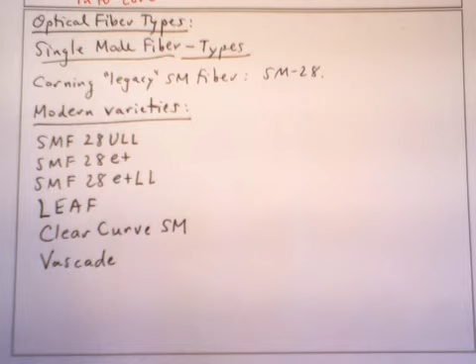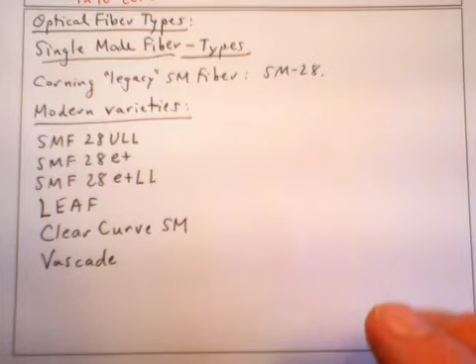Okay, I'm here continuing the discussion of optical fiber types. We just finished talking about multimode fibers, and in this video I'll talk about single mode fibers, and I'll talk about 3 different SMF28 varieties, and I'll also talk about clear curve SM. Leaf and Vascade fibers will probably come in the next video.

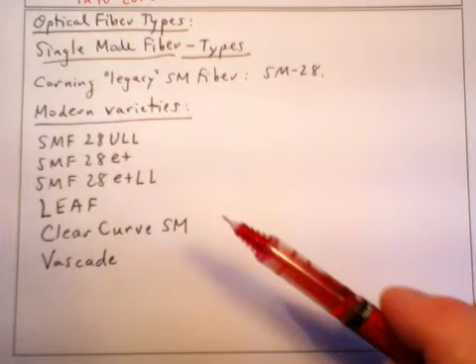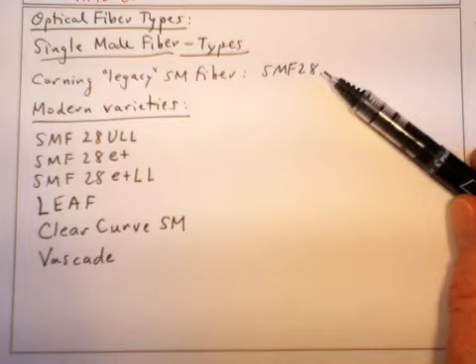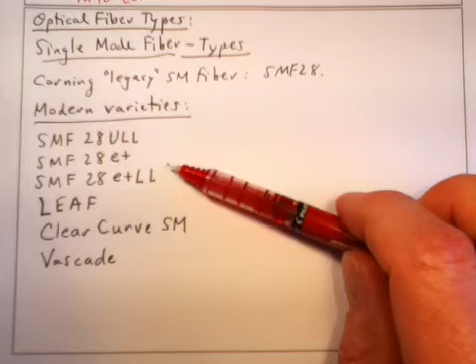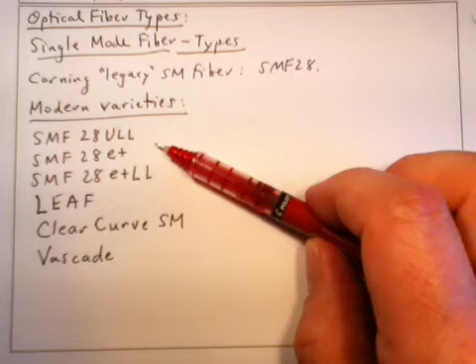If we're talking single mode fibers, the most famous single mode fiber out there is Corning's SMF28. It's been around for many years, and it's gotten better and better over time, and there are 3 different varieties currently available as of summer 2012 on their website. These 3 varieties are the SMF28 Ultra Low Loss (ULL), and then there are 2 varieties labeled with E+, meaning the water peak has been effectively removed, with a specification for the maximum loss at the water peak wavelength. These fibers are built for coarse WDM systems, which use wavelengths throughout the whole 1310 to 1550 range. I'll show you these specs.

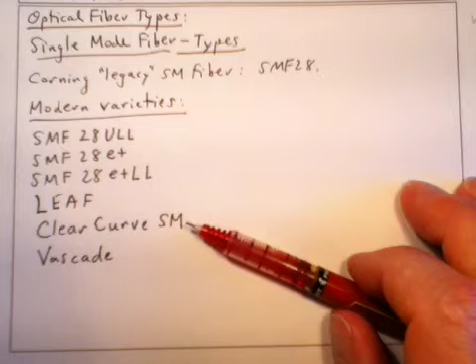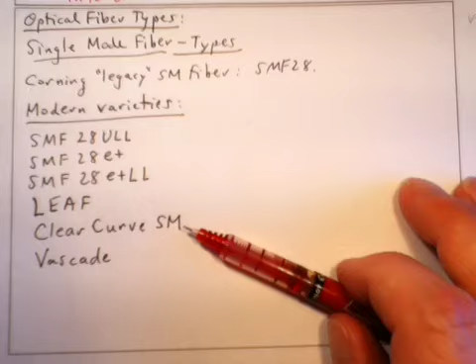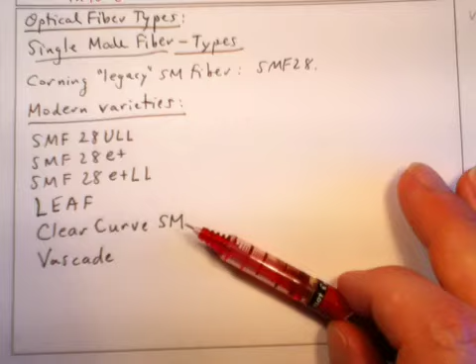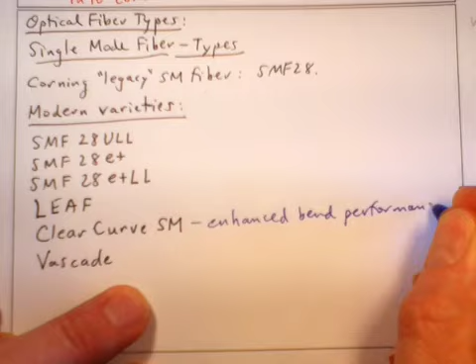Finally, clear curve single mode. In the last video we talked about the clear curve multimode fiber, and I explained how they have this nanotechnology technique for recapturing the mode in the core if some energy has been lost into the cladding, using this mirrored structure. Basically they do the same thing for clear curve SM, so it has that enhanced bend performance. I'll leave that as the extent of the discussion for clear curve SM.

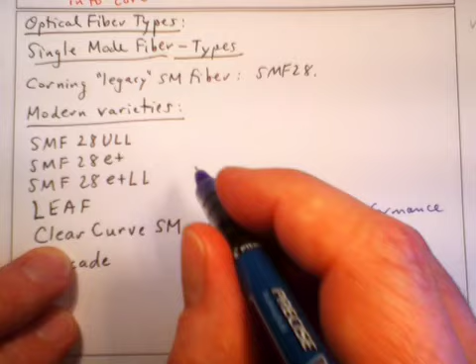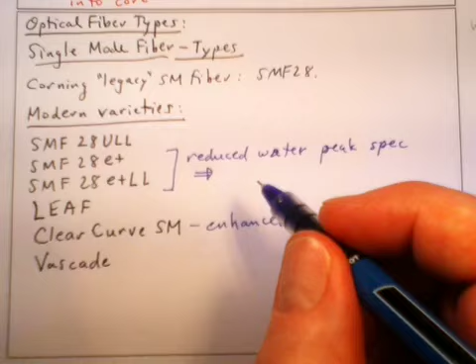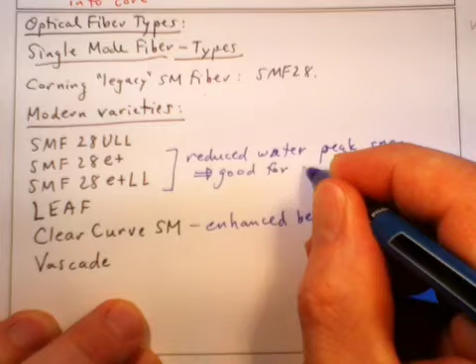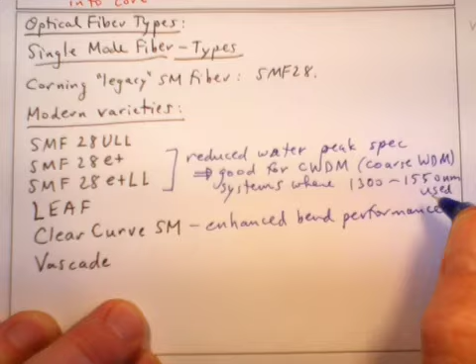The E+ varieties have a reduced water peak spec, and sometimes they're called full range fibers, good for coarse WDM systems where the 1300 through 1550 range is used.

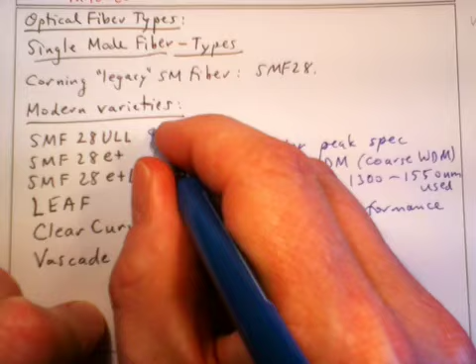And then the ultra low loss and the low loss varieties - the SMF28 ULL gets down to 0.17 to 0.18 dB per kilometer at 1550 nanometers.

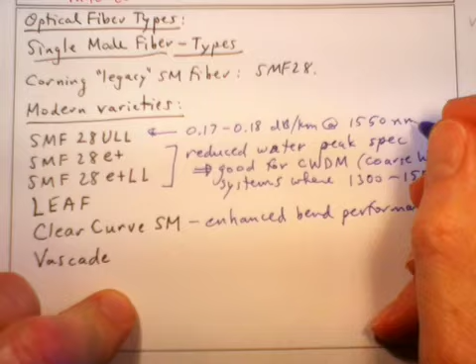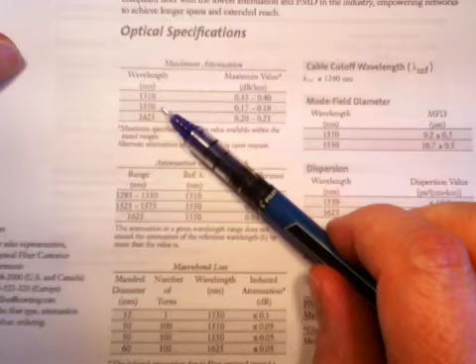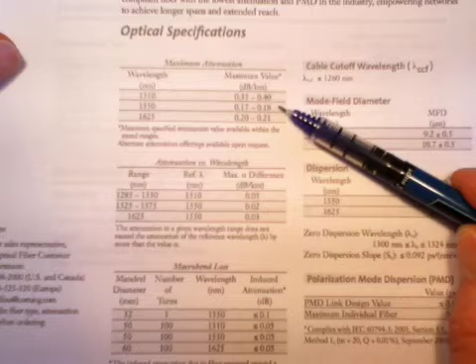Okay, let me go ahead and show you those spec sheets here. Here's the Corning SMF28 ultra low loss optical fiber, and the attenuation is given at 1310, 1550, and 1625. Essentially the spec we're looking at is this ultra low loss at 1550 in the 0.17 to 0.18 range. This is great low loss fiber, and I think it's essentially selected from their single mode fiber manufacturing as the best pieces.

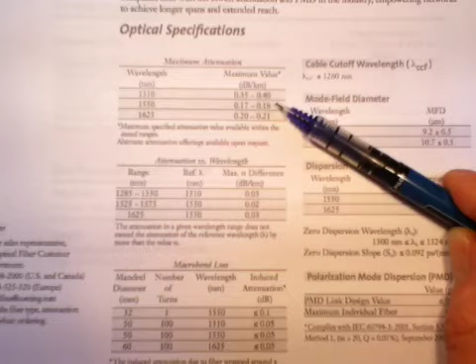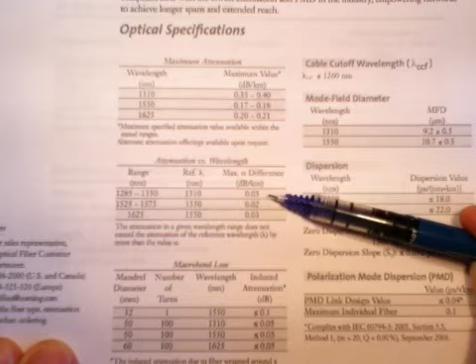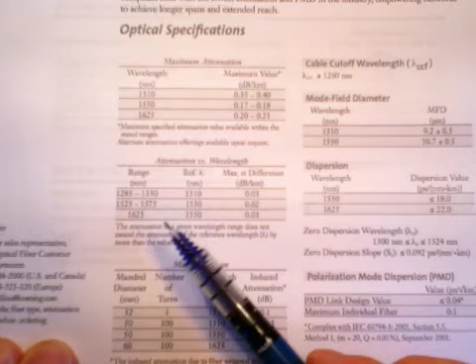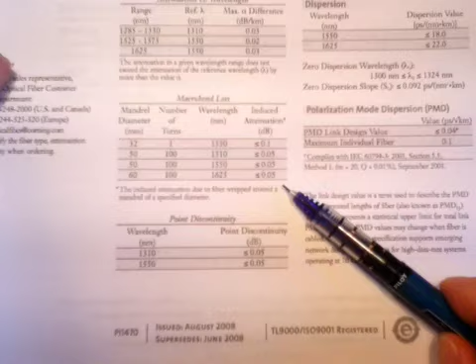Okay, so the specs also include the attenuation over different bands of wavelength - from 1285 to 1330, and 1525 to 1575. When you specify over a band, you have some variation. These fibers have macrobend loss, which is more or less the typical performance. Nothing spectacular here - this is not the ClearCurve.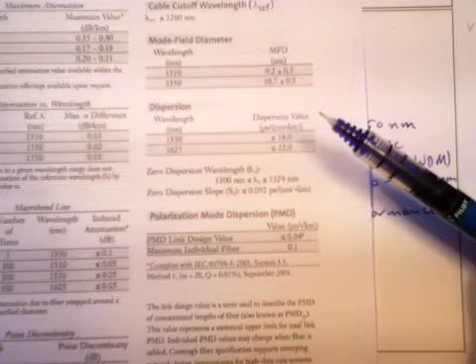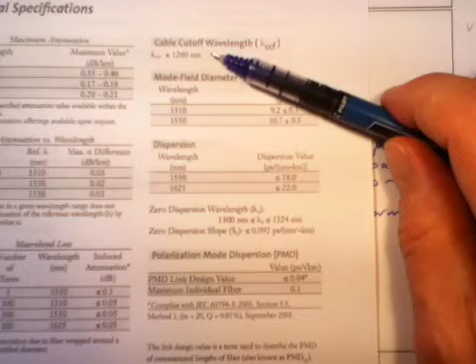We're also given specs on the cable cutoff wavelength. We already talked about this in that example problem I did earlier in this chapter. The cutoff wavelength is near 1260 nanometers, which gives us good single mode performance at 1550. The mode field diameters are specified, the dispersion is specified with an upper bound, and polarization mode dispersion, something I'll talk about later, is specified as well. Then there's a whole bunch of different dimensional and environmental specs that are given.

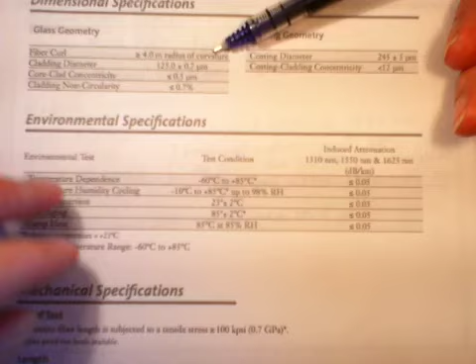I won't go through these on all the fibers - I'll go through them here on this one just to give you an idea. Fiber curl: if you just lay a piece of fiber down on the table, it will naturally curl up into a circle, with a radius of curvature greater than or equal to 4 meters.

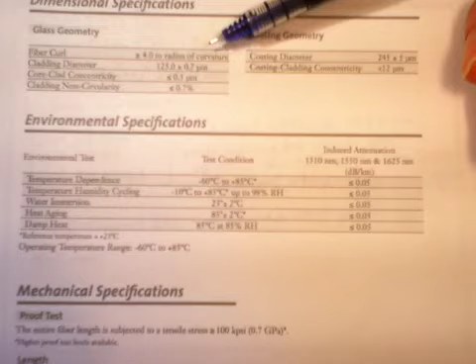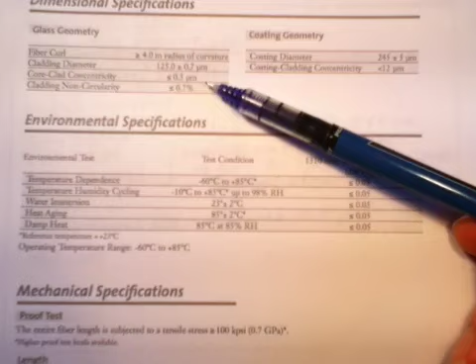Cladding diameter, core cladding concentricity, how perfect is the cylindrical geometry, and the cladding non-circularity, how good is the geometry here on all of this. Coating diameter, so this is a 125 micron cladding diameter, and that cladding is coated then to 245 microns, or about 1/4 of a millimeter.

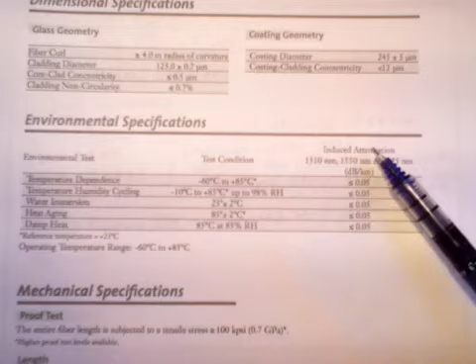Okay, and the coating concentricity is given. They give you temperature ranges for the operation of the fiber, humidity and temperature, and also give you a maximum dB per kilometer variation in the attenuation as you take the fiber over these ranges.

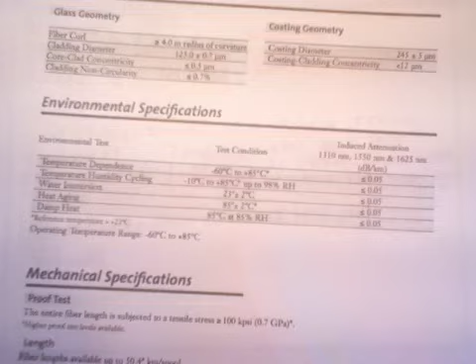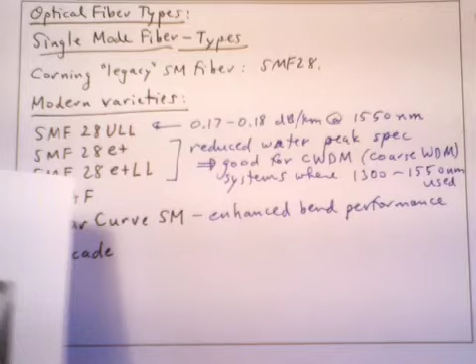So that's the SMF28 ultra low loss. The other versions of the SMF28 include the SMF28e+, and this fiber, let's see if I can get it to show it for you there. This fiber spec sheet talks about the fiber being ITUT G.652.D compliant.

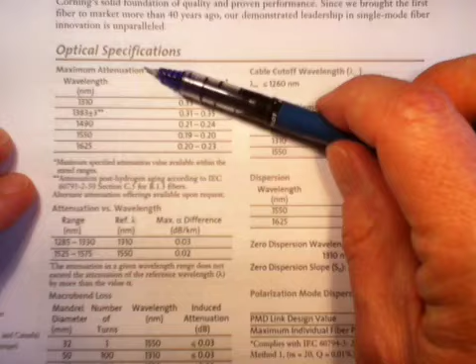And G.652.D talks about the water peak. And basically what we're looking at here is the maximum attenuation over wavelengths, and you can see here at 1490, and let's see, 1383 I guess is, don't they show a plot of the loss as a function?

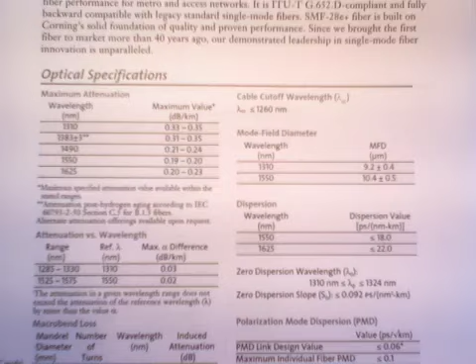Hold on. Let me find the plot I want to show to you.

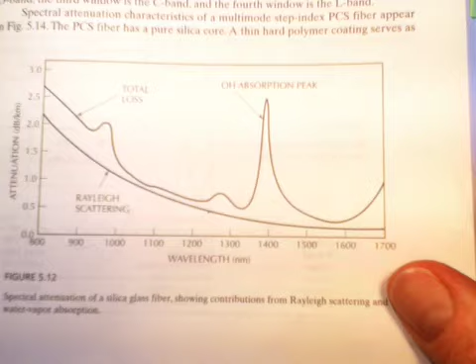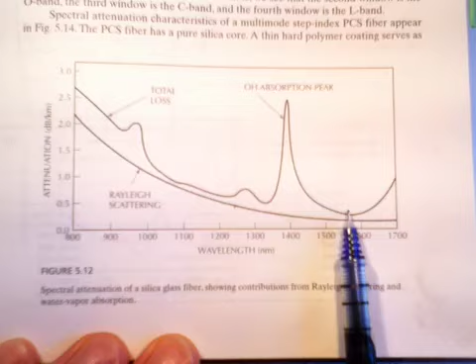Let me show you here the loss as a function of wavelength. Here's the relevant picture from your book. This is figure 5.12 on page 135 of your text, and you can see here that normally we indeed do have the lowest loss at 1550, but we have this OH absorption peak at about 1380 or at about 1400 nanometers.

And so, as I said, the G.652D spec, ITU spec, specifies that, and this is that specification at 1383. Okay, and you can see that is the highest loss at 1383, and that's an amazing loss. You know, that's very good, 0.31 dB per kilometer, or 0.35 dB per kilometer.

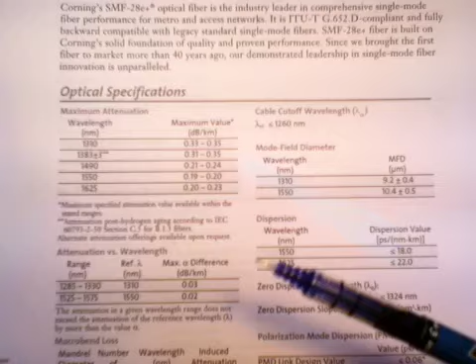If you compare that to the picture in the book, the picture in the book is showing the absorption peak going up to 2.5 dB per kilometer. Okay, and so this is really amazing.

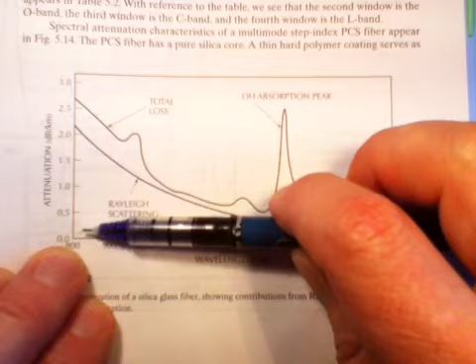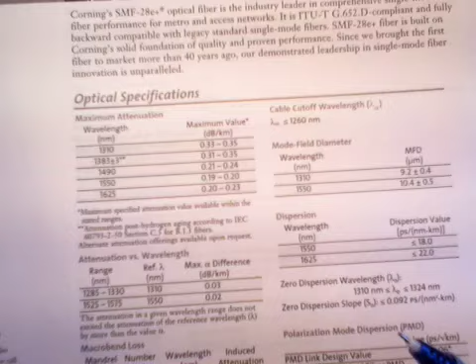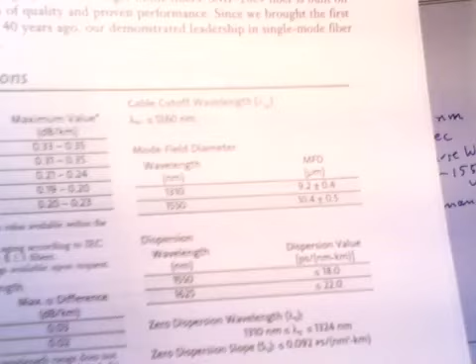These fibers are getting way down into the 0.2 dB per kilometer range at 1550 and down well below 0.5 even at this water peak. So these fibers are much better than what you're seeing shown as sort of legacy standard performance in your textbook. And so cable cutoff, and a lot of the other specs are the same. At 1550 you'll notice that the loss is in the range of 0.19 to 0.2 dB per kilometer.

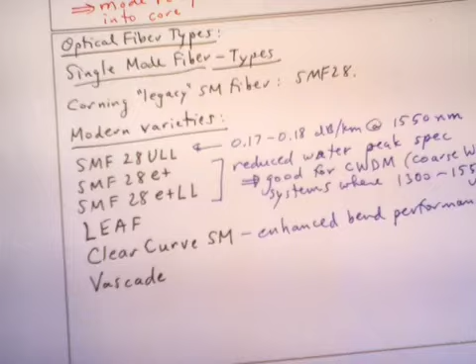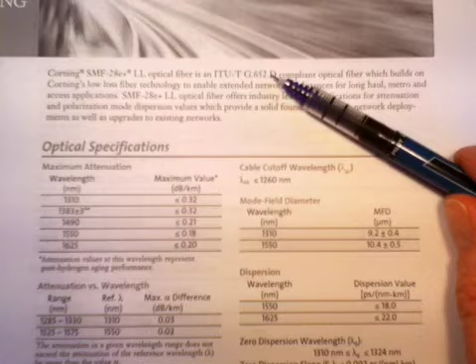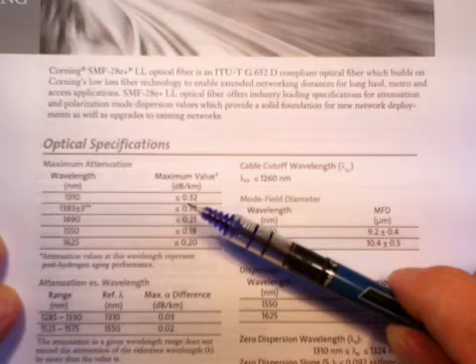If we move to the SMF28 ultra low loss fiber, SMF28E plus LL, this is the ultra low loss version of the E plus fiber. Okay, so it again is talking about G652D compliance. It again is giving the spec at 1383 where we have the water peak. That's the important one. And then at 1550 here, this is essentially the same fiber as the 28E plus, but it's been selected for low loss.

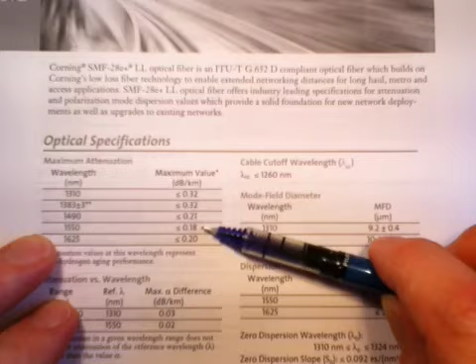And at 1550 you get 0.18 dB per kilometer of attenuation at a max on this E+. I believe you will pay quite a premium to get the LL version of the E+ fibers because it is selected from the batch to have the lowest loss.

Okay, I thought these E+ fibers had a little plot of the attenuation versus wavelength on their sheet, but I guess not.

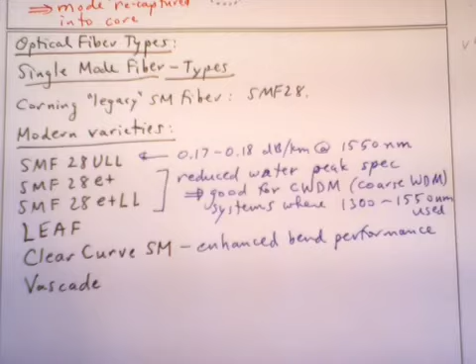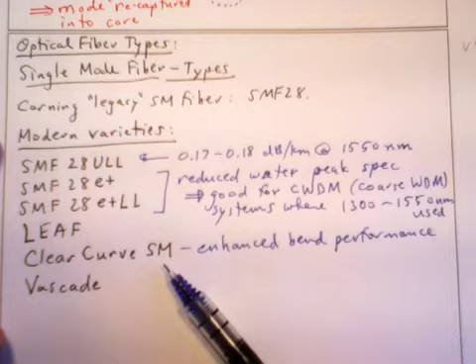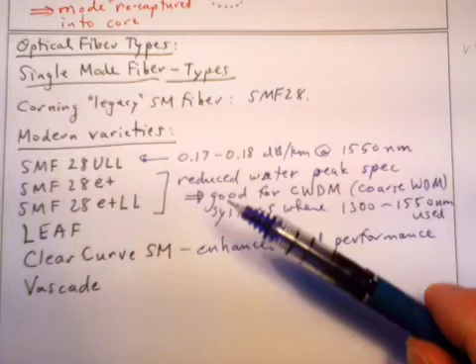Okay, so that's all I'm going to say in this video. So I've talked about the SMF28 varieties. I talked a little bit about the Clear Curve SM. The Clear Curve SM is called Clear Curve ZBL. This is the single mode version of Clear Curve fiber, and they say it's compatible with the SMF28 varieties. So in the next video I'll come back to LEAF and Vascade single mode fibers. Thanks.